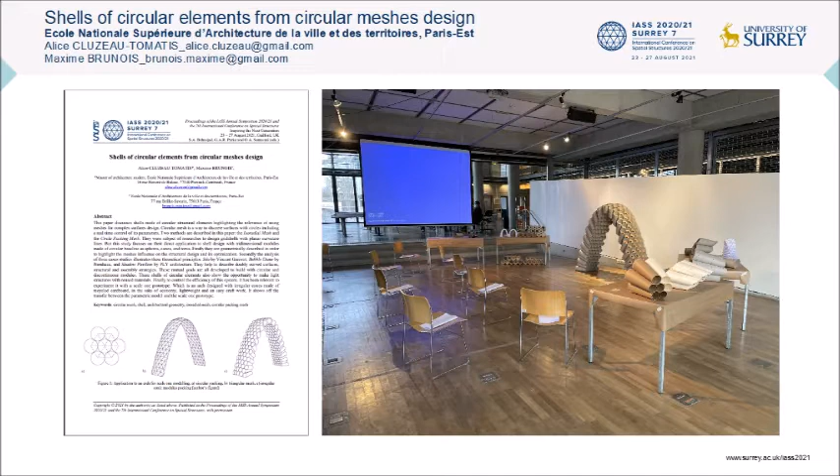The master's thesis is built in two parts: writing an article analyzing a structural system and building a Scale 1 prototype. Our article is studying circular meshes, which are a very complex subject that we try to make easier to understand.

Meshes are used for parametric conception of surfaces as a tool to optimize the shape of the surfaces thanks to geometrical rules. The aim is to design well-optimized surfaces that bring to a material saving.

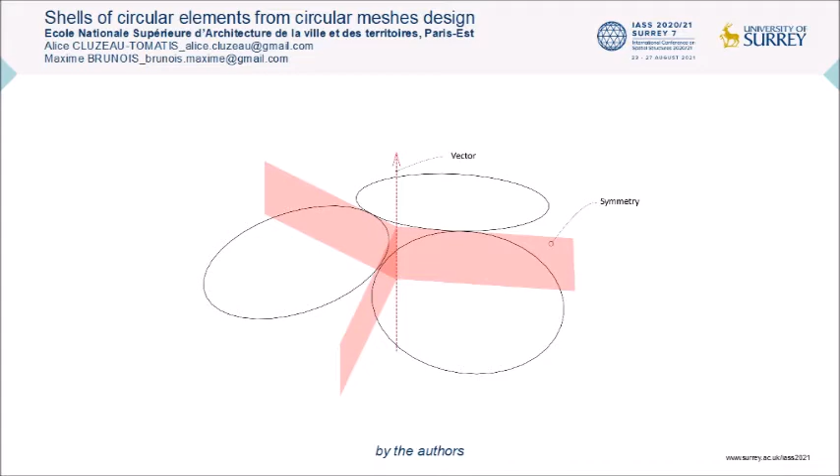The circular meshes are a tool to discretize a surface into squares. Each circle of the mesh has a square inscribed into it. Thanks to it, the surface is decomposed into planar squared faces. This is used to design grid shells with planar curvature lines and planar nodes.

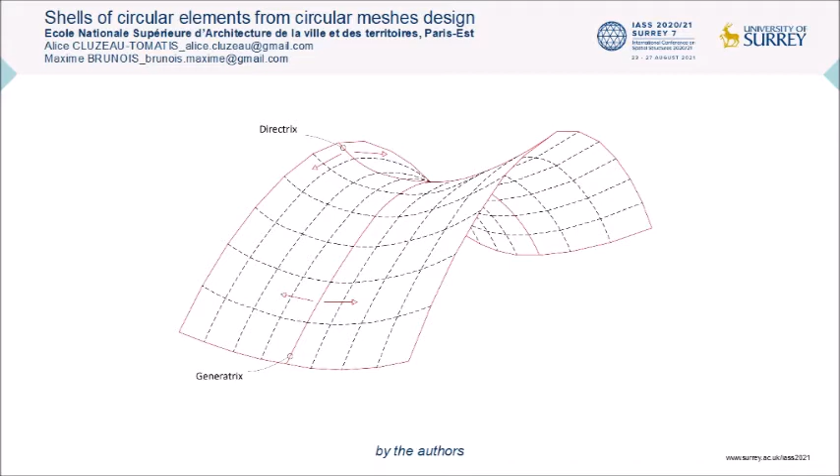But we were more interested in describing the use of circular meshes to design shells made of circular section modules. Those kinds of structures are made on a quest to experiment new use of various materials. This article is describing really easy and frugal principles to build fast and lightweight with high efficiency.

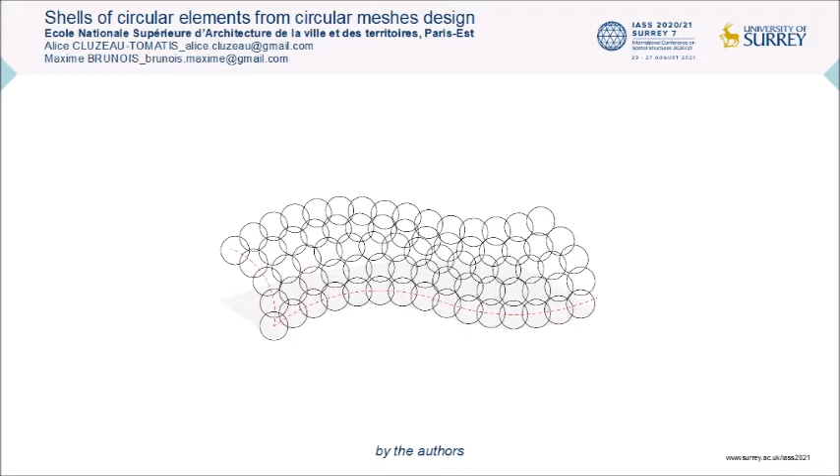The article is describing two circular meshes. The first one, the circle packing mesh, is a triangular mesh whose each triangle is included in a circle. All circles are tangent and create a packing. This mesh is easy to manipulate and to parameterize, but it doesn't offer a large panel of double curved surfaces.

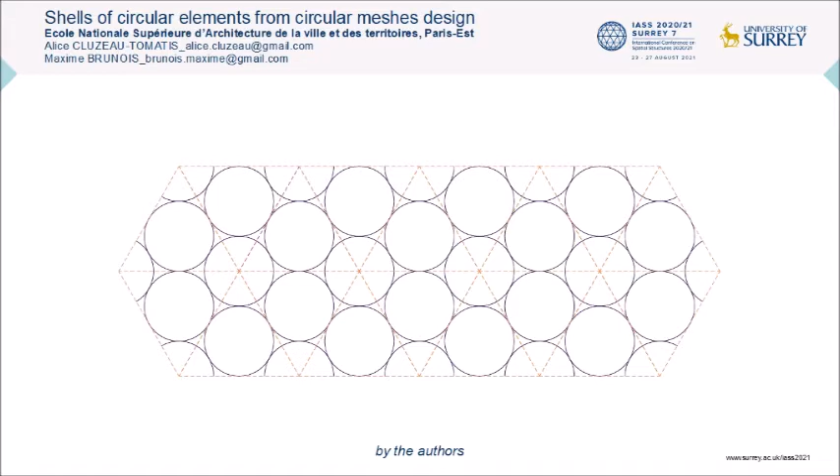The Isoradial mesh is composed of circles with a unique radius. Each of these circles is circumscribed by a planar quadrilateral face, which forms a grid once associated. The generation of this circular mesh with planar lines in both directions is made from two curves that cross at 90 degrees.

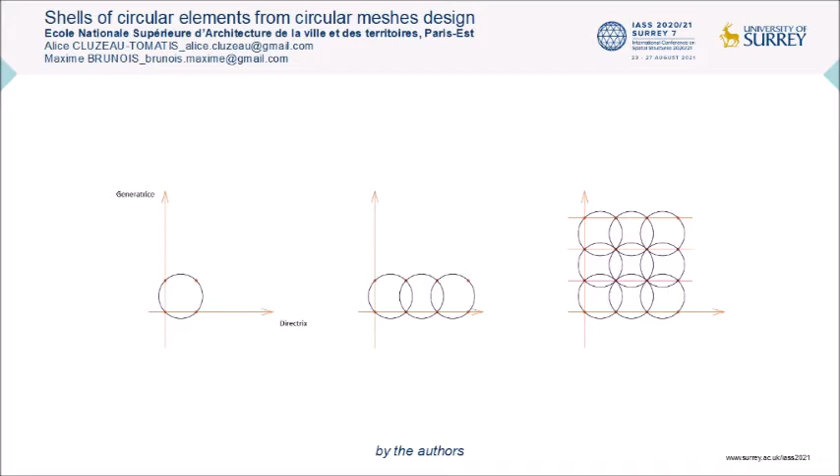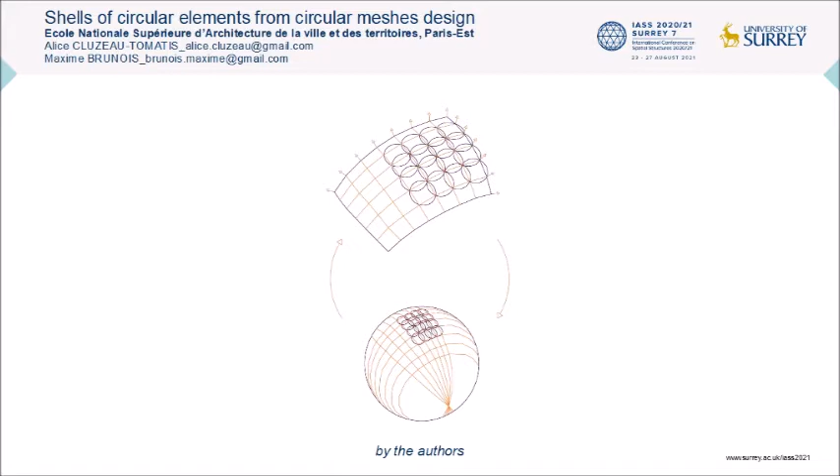These guides are called directrix and generatrix. The grid of the final mesh results from their translation in two directions. This technique helps to design free-form surfaces, unlike the circle packing mesh.

We will see several ways of using circular meshes with three different case studies. The joints between circular modules are significant because there are no edges, so they had to develop assembly strategies.

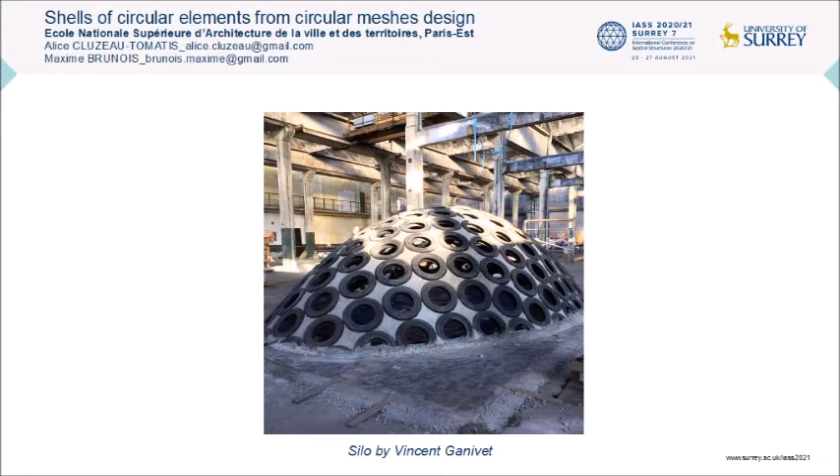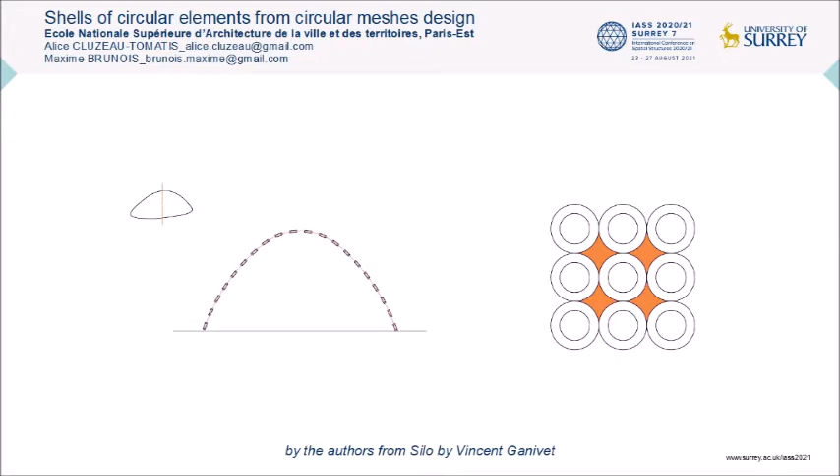Artist Vincent Ganivet's Silo was made from the Isoradial mesh, where the circles are all inscribed in quadrilaterals. The modules are made of reused tires of identical size. The connection between four tires is created with concrete, which is able to mold the round shape.

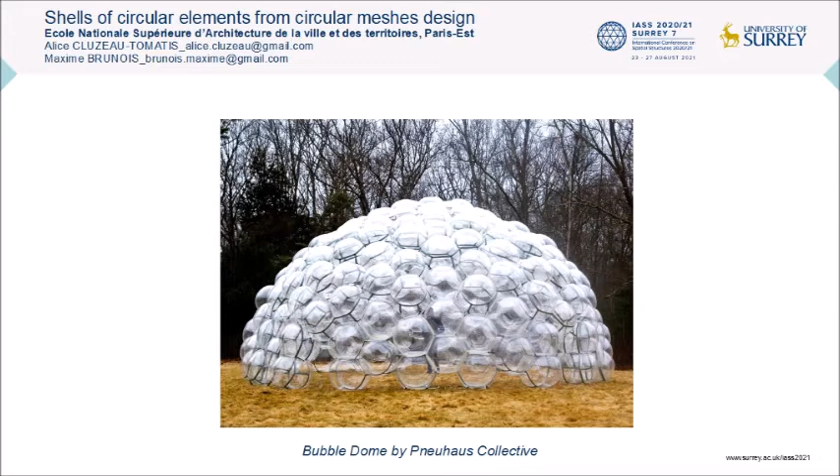The Pneuhaus collective's bubble dome is a half sphere. The assembly is made of a flexible structure that blocks the spheres together by pressure. Here, the geometrical rules of the circle packing mesh have been used to design the dome.

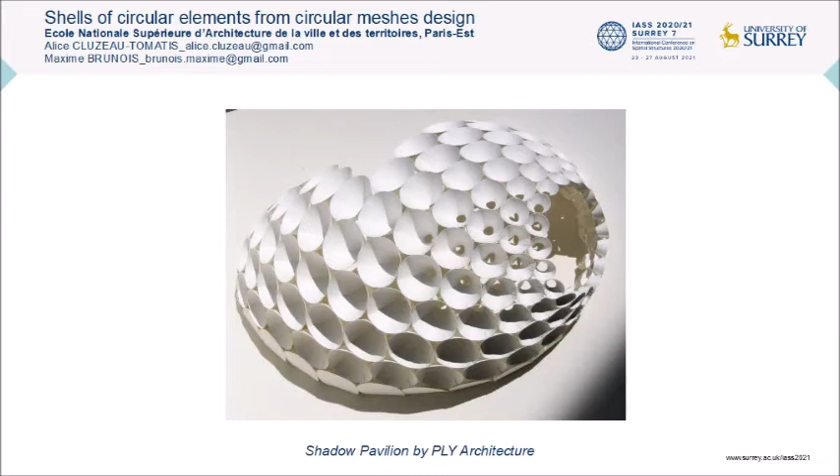As a second example, the Shadow Pavilion was built from the circle packing mesh, where the circles have evolving radii. This variation allows creating more complex shapes than with invariant circles.

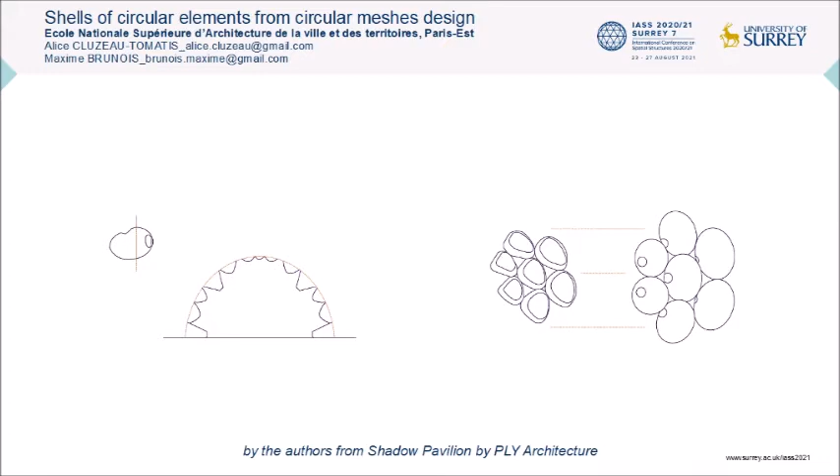The modules of the Shadow Pavilion are made of curved aluminum sheets that form cones of different sizes. This flexible material is stiffened by the curvature while ensuring its lightness.

We chose the Shadow Pavilion as a reference to design our Scale 1 prototype. The way of turning a sheet of flexible material into a rigid module was an interesting point to deal with.

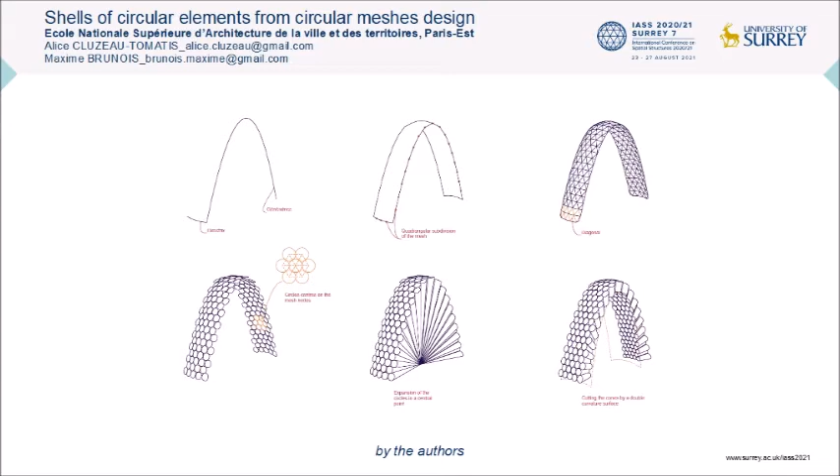We have chosen to work with the circle packing mesh rather than the Isoradial one due to its easier handling with Grasshopper software. A triangular mesh was applied on a double curved surface created.

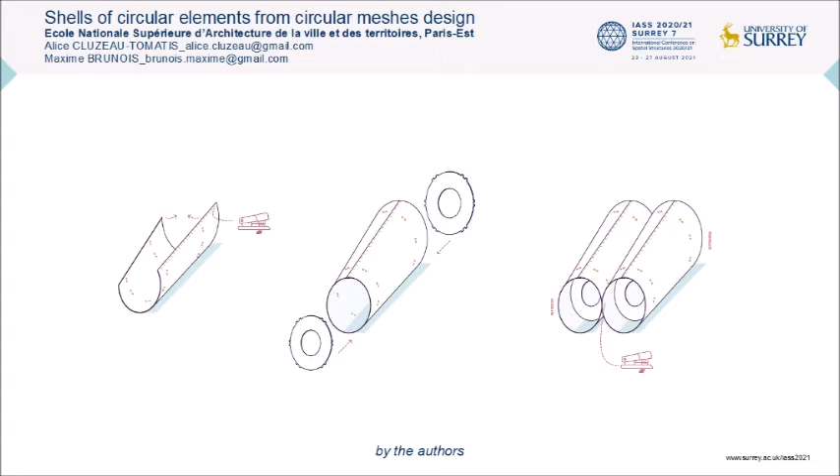Then, a circular packing is applied on the triangular mesh. All the circles are tangent. The parametric model allows a real-time modification of the surface in order to preserve the tangency between the circles.

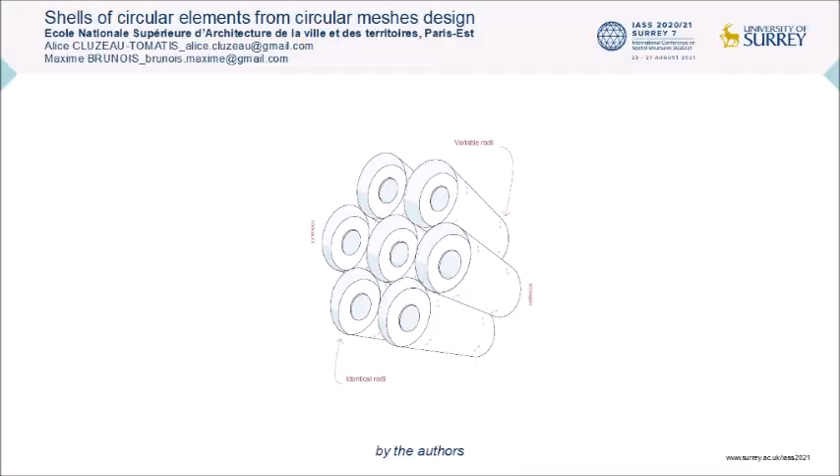This tangency is a crucial issue for the prototype fabrication. It guarantees its constructability and a contact between all the circles, which provides the load transfer through the structure. This process creates irregular and variable cone shapes according to the original surface curvature.

The modules are tangent along their lengths. They form membranes that allow the disc from the circular packing to be stabilized. This inertia varies under the loads.

The stiffeners and the conic modules have been made of cardboard. Once rolled, it becomes rigid.

Then the conic membranes and the disc are joined thanks to a tenon mortise system, which offers an interlocking and perpendicular contact between both elements. The construction process has been studied to keep the lightness and to provide a fast fabrication.

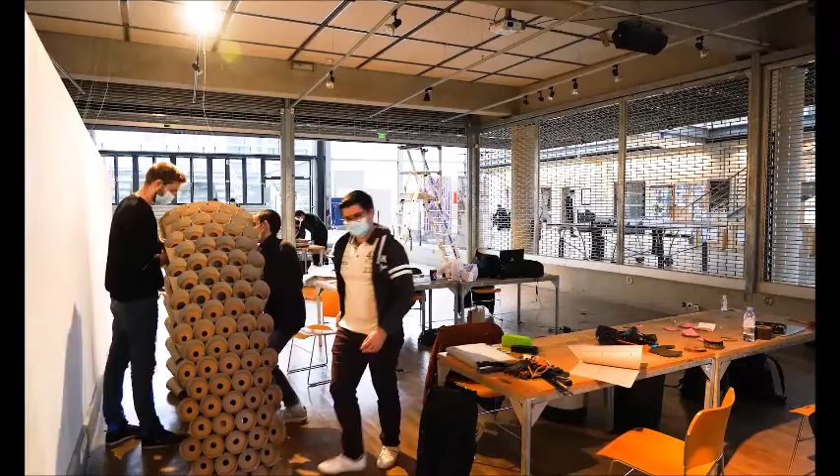This was possible thanks to the use of a numerical tool such as laser cutting. We chose to use staples to close the cones around the disc, but also to join all the modules together.

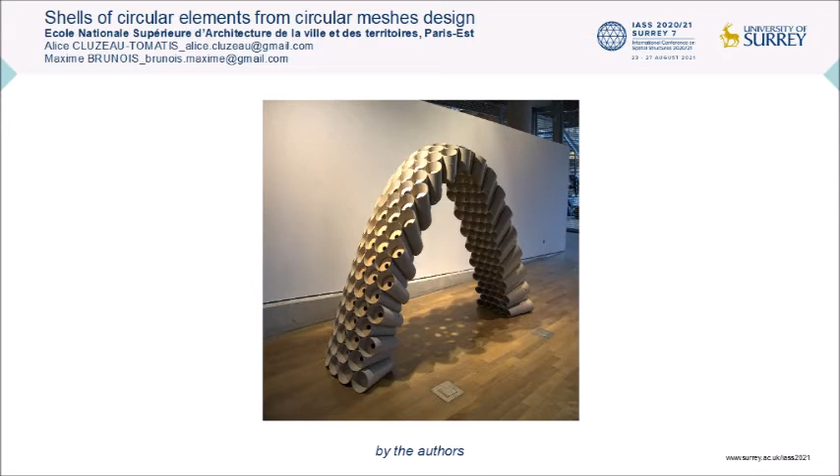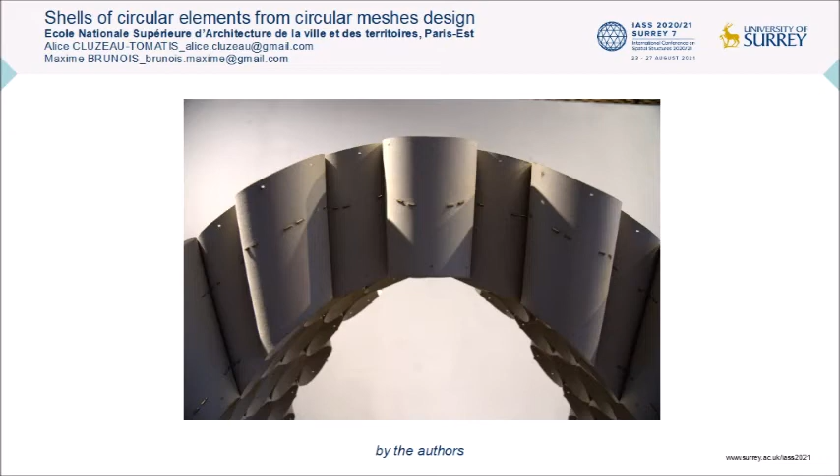The aim of this research was to create an easy and fast-made structural system that could be developed for emergency construction or ephemeral installation. These circular element shells emphasize the opportunity to build lightweight structures with reused materials, demonstrating a search for lightness and ease of implementation.